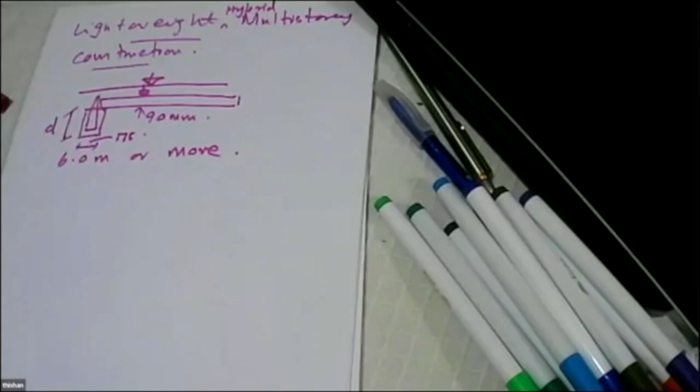Then we did a rough cost estimate, and what I showed was the weight is nearly 50%. Cost is sometimes even less than 50%, so it could be 50% or less.

Then, because we have this system where we precast the beams, so we cast the beams. It can be precast or cast in situ, depending on the lifting capacities available. If you have a tower crane, you can even precast these beams.

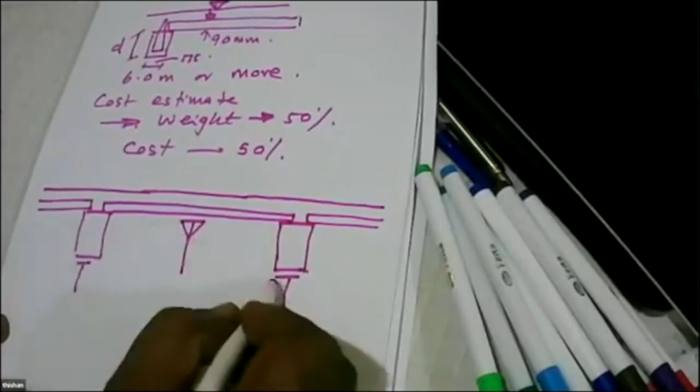Then, because we are doing a 45 millimeter thick screed, where all these beams are propped, so we prop them. There are props during the construction, so the deflection is zero.

When removing the props, first we have to remove these, then gradually remove them from the center outwards. If we remove the props from outer to inwards, and finally remove the middle prop, then we immediately increase the span by 100%.

So basically we have many props. When removing the props, it should be center outwards. But if we start removing the props the other way, removing the middle prop at once, that can increase the span by 2 times, adding a shock moment onto the system. So that is wrong. This is the correct way of removing the props.

But the center prop can be removed because the slab is not subjected to a heavy load.

Then the other important thing is, because we are having this only as 45 millimeters, the other advantage is that we can do it at a control phase so that we can finish it perfectly level, and then we can cut it so that either the tile bed can directly come on this, or another technique available is tile grout.

We add 1:1 sand as well. Rather than using grout directly, we can use a sand and grout mix, and that will allow us to maintain a slightly thicker tile bed, so that any unevenness on the surface can be taken into account by the tile bed. So you don't need a leveling screed, because if we are careful, we can do this without one.

So if you look at today's context, we need these because we are supposed to minimize the number of operations.

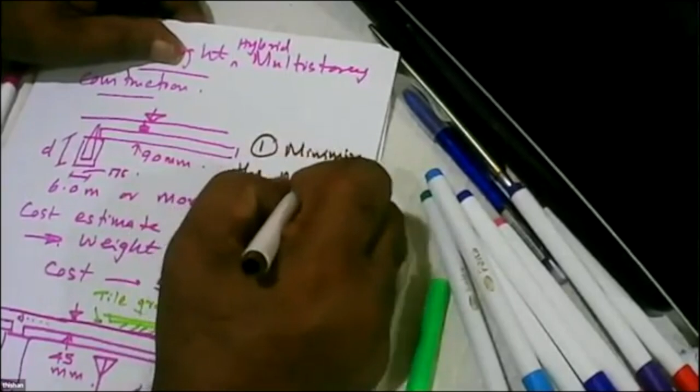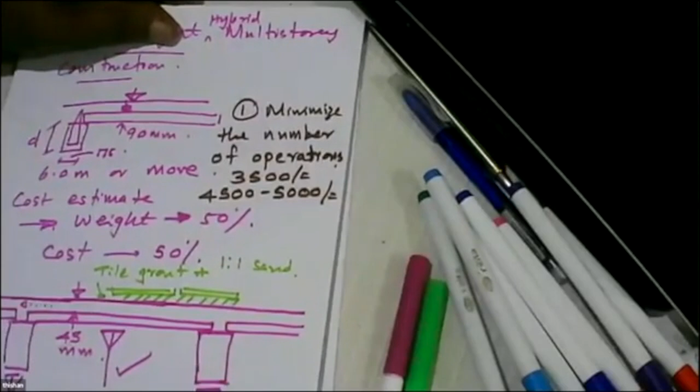Although we say labor is cheap in Sri Lanka, still we have to pay 3,500 rupees per day for a helper, and 4,500 to 5,000 rupees per day for a skilled laborer. So minimizing the number of operations is also an important part of this cost optimization process.

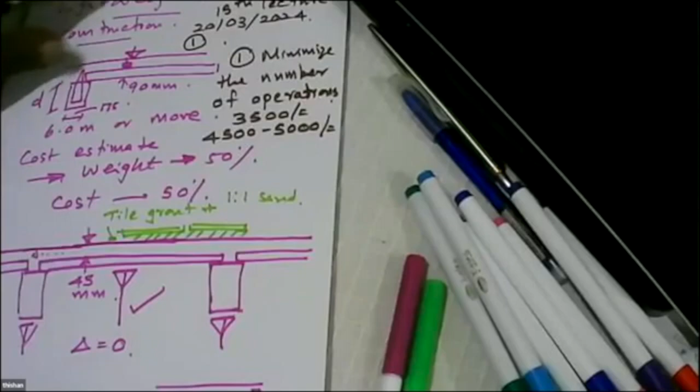So basically what you see is this. Then we have to see what possibilities are available when we try to apply this technology to apartment buildings and houses, and what remaining parts of design we have to do. So far we have covered most of the concrete related designs, like the design of the slab system, the composite system, and the design of individual beams. So all those have been covered in great detail.

Now today I'm going to talk more about, because it's a hybrid system, we are going to have a little bit of involvement of the wall. So the concrete block wall or cement block wall is also playing a role. So we have to look at masonry design and also the column design. We'll look into that aspect a little bit.

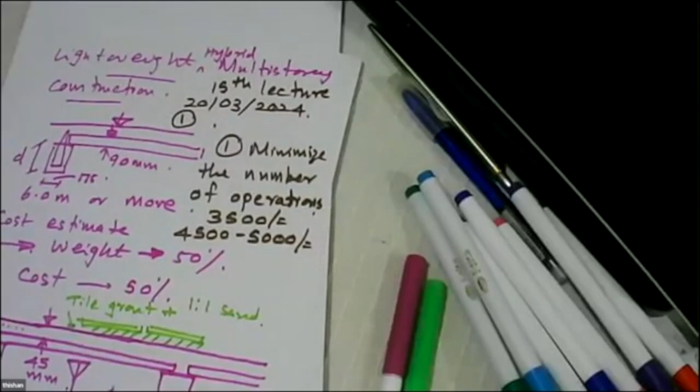So, the number 2. If I look at a typical scenario, let's say we have a house like this. So we have the rooms, this area.

Like wet kitchen, pantry, and bedroom, and washroom, whatever - it can be anything that we like. I'm trying to use the same plan I used earlier to highlight the issues. This might be the living area, and you might have a garage and entrance and bedrooms, washrooms, and so on.

So what are the issues? If you look at this type of system, how can we optimize? Here, these are living areas, so we might have large openings. We might need some columns like this, some columns like this, and we can have some columns like this, and we might also consider having some columns at these locations.

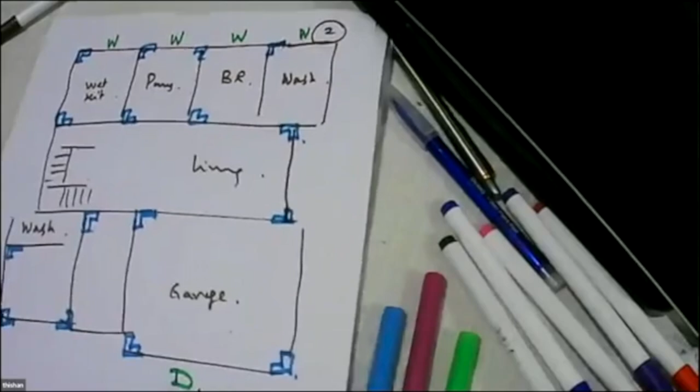So why do we need columns like that? For example, we need large openings, windows. We might need large doors here, and we might need large windows here, and we might need another large opening connecting the living and garage spaces, and here we might need a big window.

So when you consider all these possibilities, what is the best way to arrange the beams and how to optimize? Because we are having some columns here, we can certainly run a main beam here. I'll use purple for the main beams. We can run a main beam here, and we can also run a main beam in this selection area. Run a main beam here. Run a main beam.

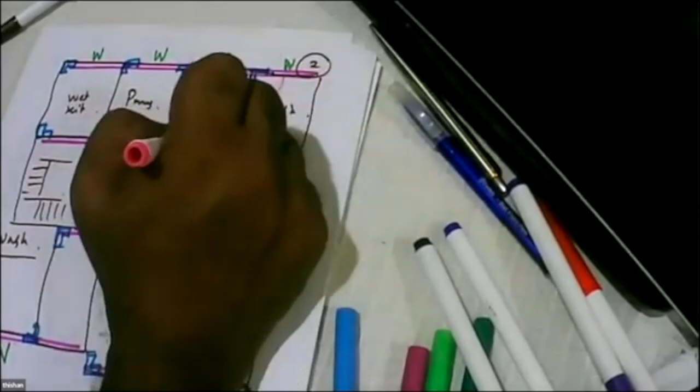Then we have to see in which direction we run the secondary beams, the beams that will support the slab panels. If you look at that aspect, what you see is we can run a set of beams like this, and we can run a set of beams like this, and we can also run some beams like this.

If this area is about 2 meters, you don't need to - you can directly support onto the beam, and here also we can run the beam like that. So those are the possibilities, which means we are running the slabs this way. Here also we run the slabs this way. So if you look at the scenario...

Here you can see these slabs will span this way. So these 4 meters, that is 4 meters, so half of that is 2 meters. So we have a beam. So this wall will carry a load. This wall will carry a load, and the load has a width of 2.0 meters.

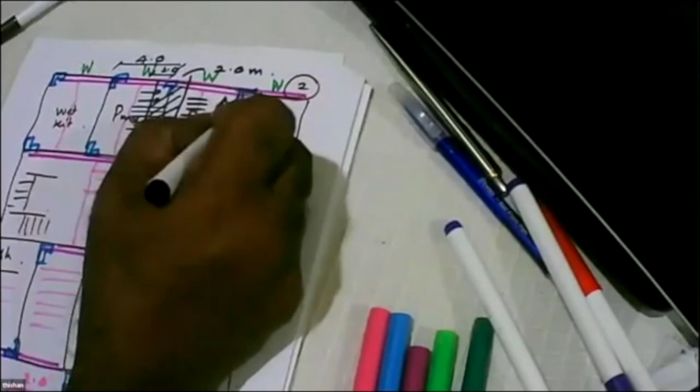And this beam will carry a load - 50% of this will be transferred this way, 50% will go that way. But that 50% will go onto another concrete beam, and there are concrete columns to take that load. So the concern may be the load that is transferred onto the masonry wall.

So we have a masonry wall. The thickness can vary between 150 to 200. Minimum is 150, and generally the maximum width of a block wall is 200. So we have an upper limit of 200. There's a load - a panel supported on the wall directly. Then on that we are going to build another wall like that, and then we might have another slab.

So if you consider that the load from the slabs - the slab thickness is 90 millimeters - so we have 1.35 times 0.09 into 25, plus 1.0 for finishes, plus 1.5 times the load. The minimum load specified in Eurocode is 1.5 for houses anywhere in the house, but we'll assume something like 2 just to keep a small margin.

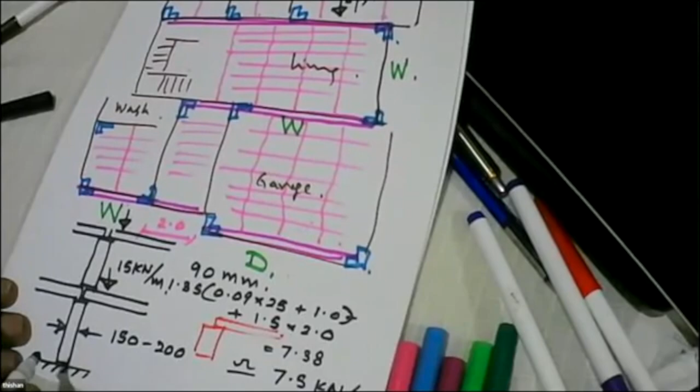So the question is, how many floors can this 150 millimeter thick wall support before it reaches its capacity? That is a question we have to ask.

For that, we have to look at masonry design. I'm planning to cover a little bit about masonry design. We have to learn how to deal with Euro Code 6, which covers masonry design, and see how the masonry design part of this hybrid construction can be handled.

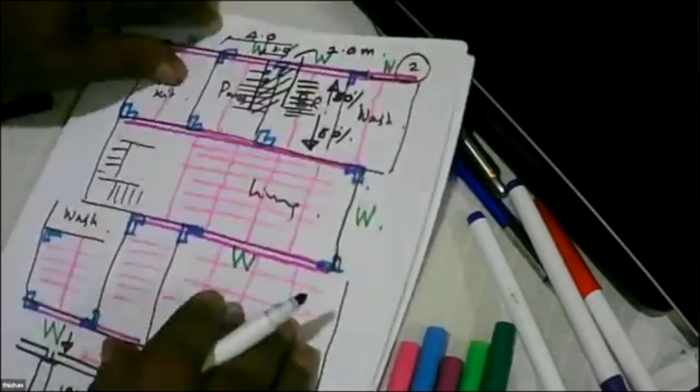But before that, we look at how to handle the reinforced concrete design part of the frame, or the structure. The reinforced concrete part will be these L-shaped columns and the beams supported by them. So now let's look at the situation on page number 3. We have to see where these columns will come.

So we have a wall, and the wall goes like that. When we have a wall like this, we can have two possibilities. The first possibility is we can have a typical 225 by 225 column, with the wall at 150 millimeters, and we try to fit this column.

But there are many disadvantages. One is it creates a corner, and plastering this corner is a difficult task. It takes time, it takes labor. It will not take any extra material, but it takes labor. And people find it unacceptable to have columns projecting like that.

So what is the other option available? The other option is to have 300 this way, 300 this way, and a thickness of 150. So it's an L-shaped column.

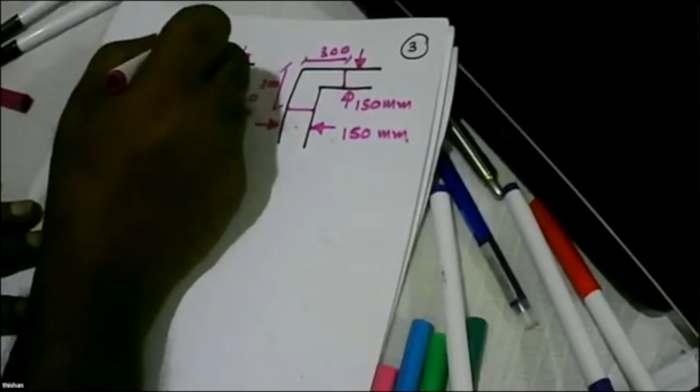Now let's do a comparison. This one is 225 by 225, so the area is 225 by 225. Here the area is 300 by 150 plus 150 by 150.

Let's do the numbers and see which one is bigger. 225 by 225 gives 50,625. The other one, 300 by 150 plus 150 by 150, gives 67,500. So we have two areas, and you can see this L-shaped column is even bigger. Although it looks small, it's bigger.

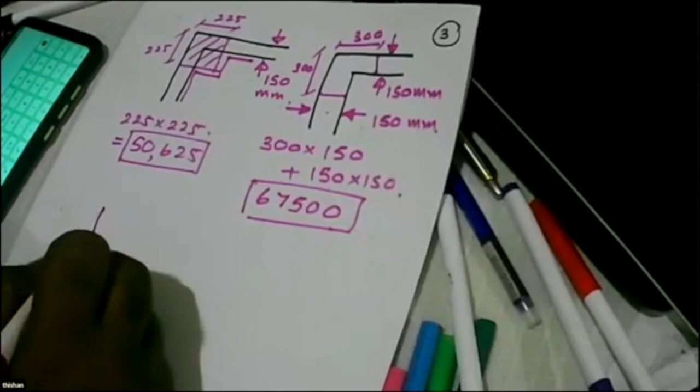If you look at the type of loads that come onto this column, the loads will primarily come from this side, going until it meets another column. These are the main beams, and every 2 meters it will have a beam running in the other direction.

So you can see these 2 meter spans, and all this load from here to here will be transferred onto this beam. And in this direction, if we have 4 meters, say 5 meters, then the load on this beam will be distributed like this. Let's assume this is a large window, with similar windows in the upper floors as well, so we can simplify the calculation.

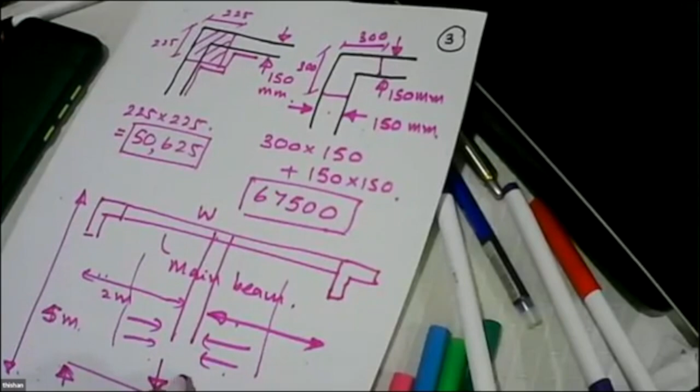So what we get is a load of 7.5 into 2 meters into 5 divided by 2, which gives 7.5 into 2 into 2.5. So we get a load of 37.5.

And since it's a continuous beam, we can analyze it, and you can see it's not a major load. Then we have to see at which level we can have this beam, because if we have a window, we need to have a lintel as well.

If you look at the level we need this beam, you'll see the building opening. Generally the openings are 2.4 meters tall, and each block has a height of 200, so the main beam can have a height of 2 times the block work, meaning the beam can have a height of 400. Then at the center we are getting 37 point...

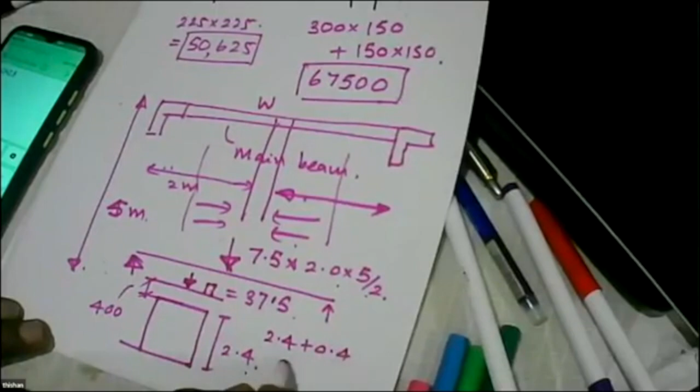Then we have to decide whether we are going to have the beams in the other direction, like this beam, and at which level — that's something we have to work out. So it's 2.4, 2.8. You find that 2.4 plus 0.4, plus if the height of the beam system is let's say another 0.4, the floor to floor height is 3.2 meters, which is not excessive.

So these numbers have to be carefully worked out. You have to decide at which level this beam will run, and ideally we run it at the lintel level, so that this beam automatically forms the lintel. So you don't have to spend money on a lintel or anything — the main beam will be the lintel as well, so there's an advantage there.

So if you look at this scenario, here we get a load of 37.5. Half the load will go this way, half will go the other way. So you can see from each floor what you are transferring onto the beam, and when you consider self weight of all these beams, it might be about 20 kilonewtons.

So you can see, we are not transferring a huge load, we are transferring a small load when the rooms are small.

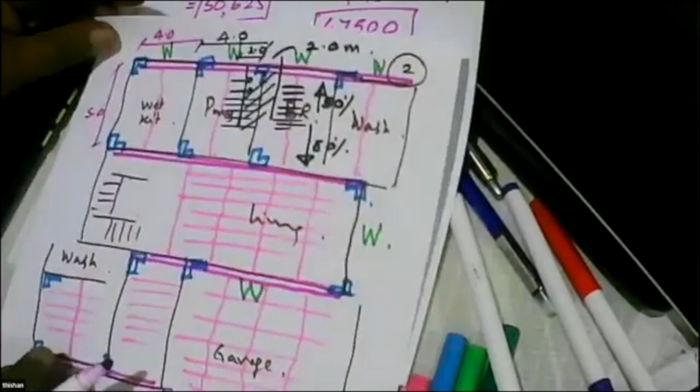I'm looking at this part of the building, where this can be about 5 meters, and these are around 4 meters. So that part, because we are transferring part of the load into this side by having slabs, and also we are having windows one on top of the other, the loads on this beam will not be excessive. So this column is very lightly loaded.

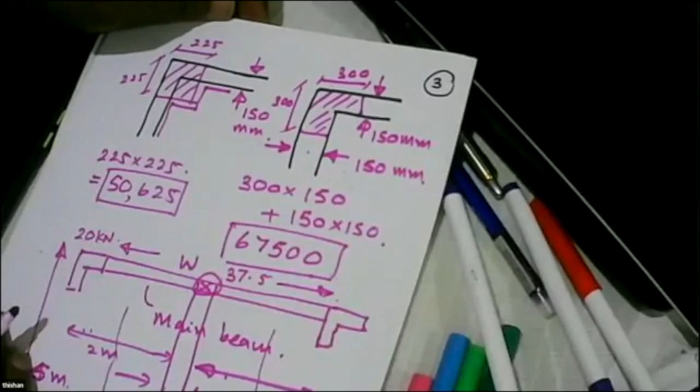So what I want to tell you is, we have a column that is very lightly loaded, but it has an area bigger than this column. So which means this is good news. Why? Because we have a column supporting a main beam, but it is not excessively loaded. So this says, okay, we can have minimum reinforcement on this column. That's good news, because we want to minimize the amount of reinforcement needed in the building.

So what is the reason for this? The reason is, part of this load is actually taken by the wall. That is the reason. So you can see, not only with the slab, even with the frame involved, we are going to get advantage where we need minimum amount of reinforcement.

So if you look at this scenario, let's look at the column. So I'm showing you the possibilities. So when you do the actual calculations, we can get the exact numbers. So this has 300. This has 300. This has 150. This has 150.

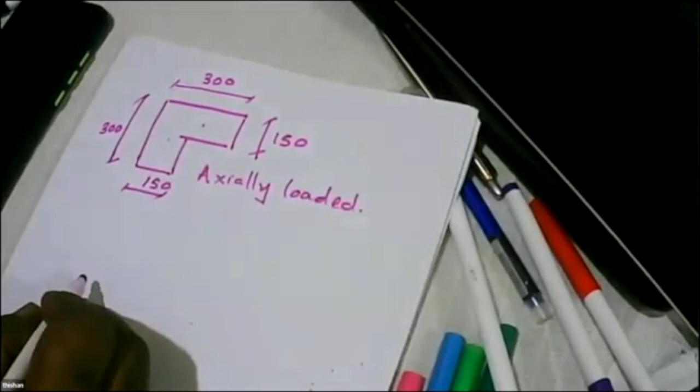So let's assume that this is axially loaded. Then without reinforcement, and let's assume that we have been smart and we have been able to get a concrete of C25/30 by using some admixtures and also with proper curing. So if we get 25 megapascal concrete,

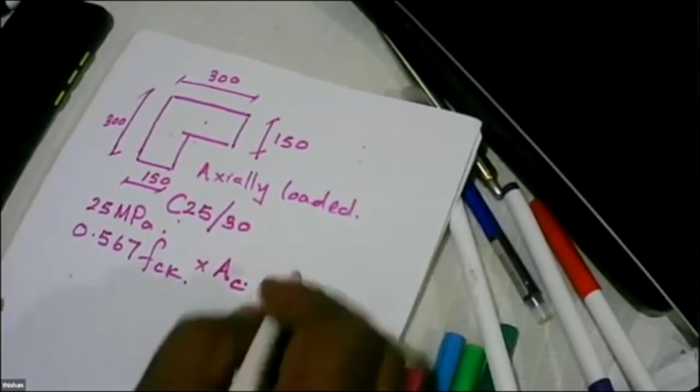what is the load carrying capacity of this section? Load carrying capacity is 0.567 FCK times area of concrete. How to get it? Because when you test a cylinder, strength is FCK, so the axial load carrying capacity is 0.85 times FCK, and we have to divide it by the partial factor of safety for material strength, 1.5. So 0.85 divided by 1.5 is 0.567.

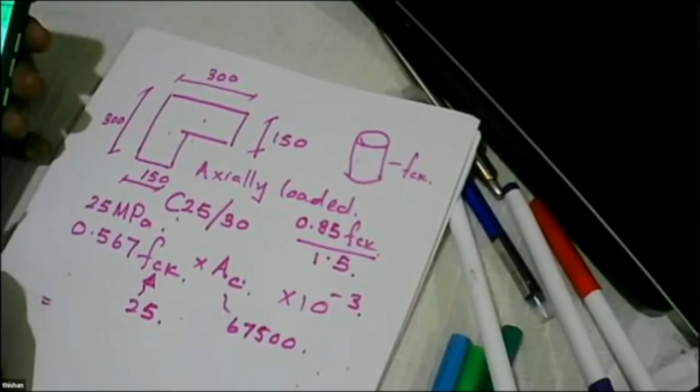So we can substitute 25 here, and we can substitute the area 67,500 here, and we can divide, 10 to the power minus 3, and you will see that this can carry 0.567 into 25 into 67,500, which gives 956 kilonewton capacity.

So you can see this column, although it looks small, it is not small. It is bigger than the typical or most familiar size of columns, 225 by 225 column. It's bigger, and it can carry about 956 kilonewton. And its buckling tendency is very low. Why? It's L-shaped, and each direction has a length of 300 millimeters. So the tendency for buckling is very low, because it has a 300 millimeter length in one direction. Although this part is empty, the buckling tendency is very low.

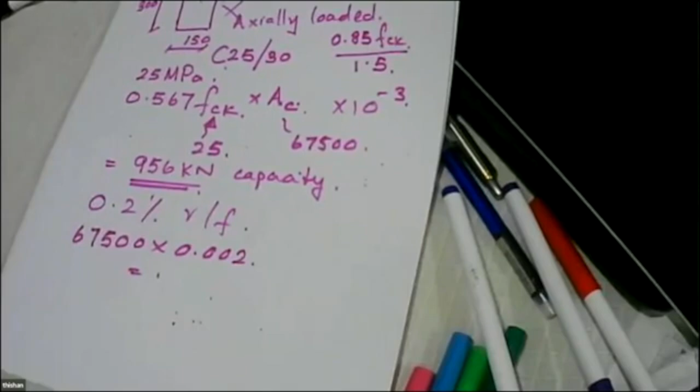So we can provide 0.2% reinforcement as practiced in the Eurocode. So 67,500 into 0.002 is equal to 135 millimeters square. But Eurocode says when you are providing reinforcement, the minimum size for the vertical bar is 12 millimeter. So you need a 12 millimeter bar.

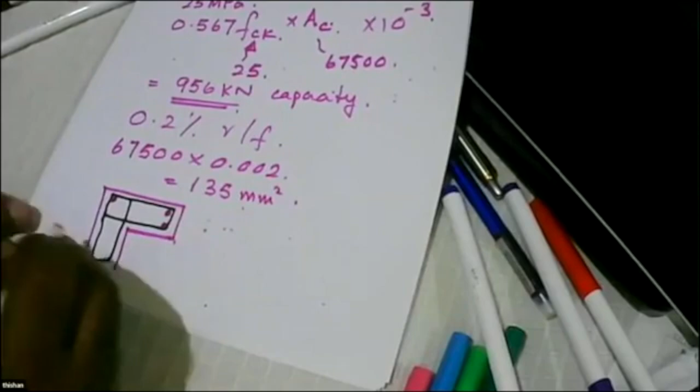We need one bar. So the moment you have bars like that, we can have a link, and we can have another link this way. That also can be provided with 2 bars. So the minimum number of bars that we need in this column is 5 numbers of 12 millimeter, giving 113 into 5. So something like 550 millimeter square is much more than what is given there.

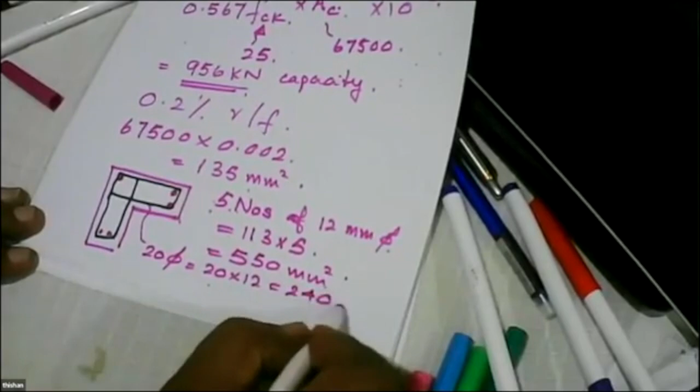Then we can have links at 20 times diameter. 20 into 12 is 240. So we can have links at 225. And Eurocode recommends at the top and at the bottom, 400 millimeters, reduce this spacing up to 0.6. So 225 multiplied by 0.6 gives something like 150. So here we can have 150 center to center, bottom 400 millimeters, 150 center.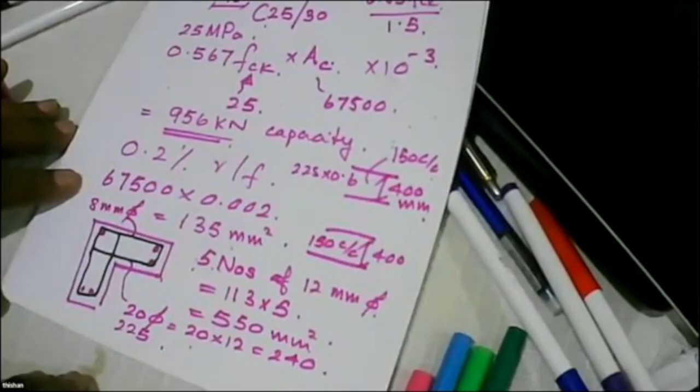So you can see we need some links, and unfortunately we don't have any bar size less than 8 millimeters. So this link has to be 8 millimeter, because Eurocode does not allow mild steel. It says any reinforcement should be 400 to 600 type. It doesn't talk about the link specifically, so the link also should be the same strength. Because of that reason, the smallest size of reinforcement available in the market is 8 millimeter. So we have to use 8 millimeter links.

This shows the possibility that we have a column which actually goes into the wall.

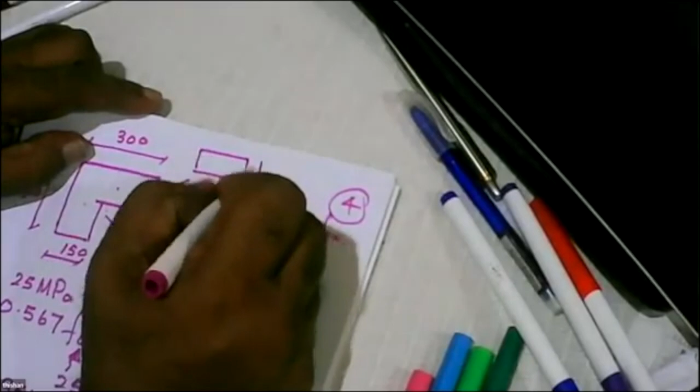But then you might ask, why don't we go for a 300 by 150 column? We all know 150 is not a very safe dimension because this might have a tendency for buckling. So why we go for L shape is to prevent that tendency for buckling. The moment you prevent the tendency for buckling, how does the column fail? Column fails by crushing of concrete. So we ensure that the column fails by crushing of concrete, not by buckling.

Otherwise, this L shape is not needed unless for the buckling tendency of thin columns. We deliberately make the column thin for practical advantages, like not showing the presence of the column at the corner. So we are going for L shape, which is actually larger than the normal column. We need a little extra concrete.

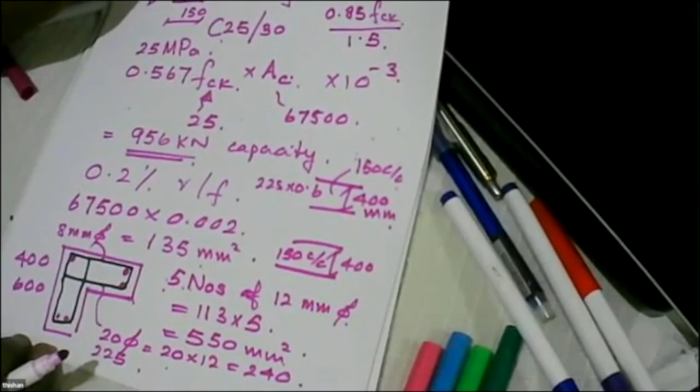But if you look at the system, the main advantage is we run the main beams only in one direction.

All the other beams are beams of the slab system, or else we might have a beam at the lintel level like this, or we are making use of the wall to carry the vertical loads. Because of all these reasons, we can get a significant cost advantage, since we are using the minimum size reinforcement, and even if we go for 5-6 stories, still we can go with the minimum size of reinforcement. That's a huge advantage when you consider the cost of construction.

And the other important aspect is these columns are not obstructing the arrangement of the interior, because columns can be made part of the wall system. Is that clear, Bandhukar? Yes, that is clear, sir.

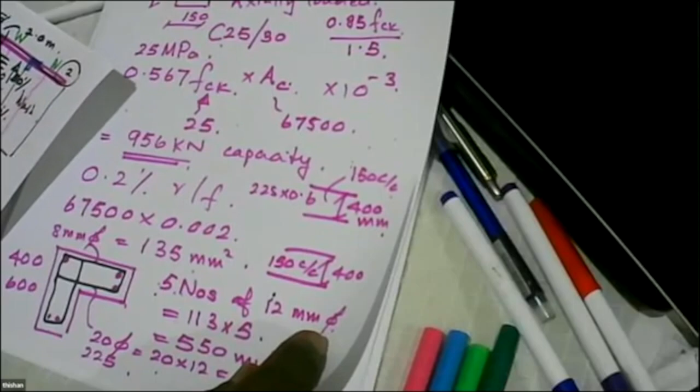So now you can see there's no major issue with the columns, and the main beam is also not a major issue. But it's most likely that because we are going to have this main beam at the lintel level, we will have to design the main beam as a rectangular beam, 400 deep, 150 wide.

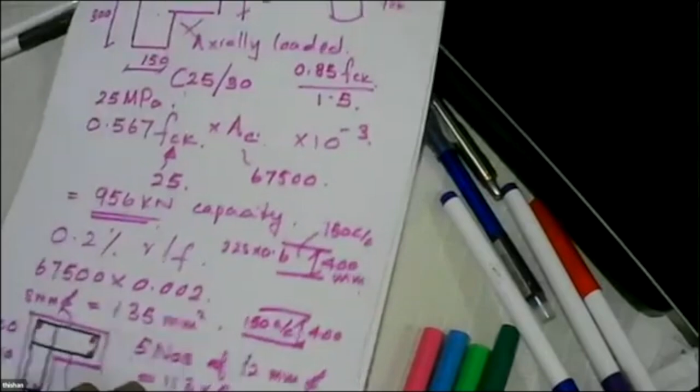So there's no buckling tendency in any of these members because they are all part of the masonry and concrete system. So then you might ask, okay, so we can see the possibilities for apartments, but I would like to take one step further, explaining the possibilities for apartments.

In an apartment building, we can have large spans like this, where two of them might form, or one of them might form the apartment, depending on the size. So this can be about 7 meters, this can be about 8 meters. 8 multiplied by 7 is 56. So this area is about 56 square meters.

So in an apartment building, what we can do is go for large spans like this with columns at the corners. This is only a possibility, so you have to think and see how best we can optimize, so we can get the whole apartment, or about 50% of the apartment, onto one panel like this.

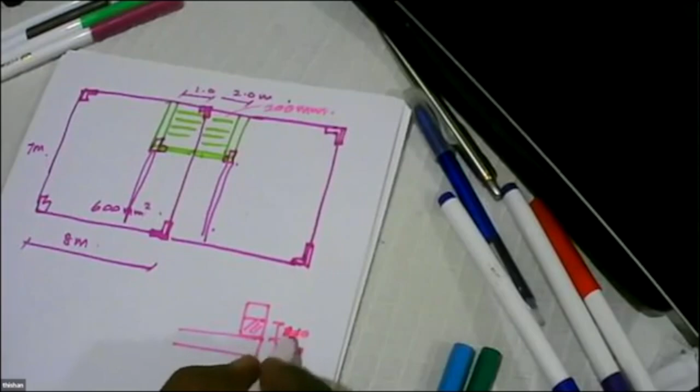So we can have the panel with a drop of 200 millimeters and fill this up. So this can be 200, and our panel can also give 90. So this can be 110. So we make up 200 millimeters, and then we can run other main beams.

The advantage of this is that now if you are going to have any partition wall, it is not a major problem. Why? These beams - now if we want a partition wall, what we have to do is below the partition wall have a lintel or a beam of 200 millimeter depth, and the partition walls can be 100 millimeter. So what happens? This beam will transfer the weight of the partition wall onto this beam and onto this beam.

And when you are designing the beam, because we have to design the beam for all these loads, you will find the beam is subjected to a UDL plus a point load. So it's a matter of designing this beam to carry it.

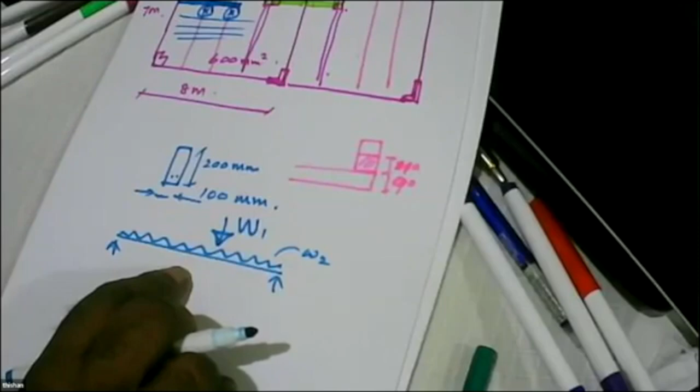So you can see there's a huge possibility that is not available with solid slabs, because solid slabs are not capable of supporting this kind of partition walls without having a huge amount of extra reinforcement. Whereas in this system, because we are having beams, we can easily support any kind of partition wall either across the beam or along the beam. So we can have a partition wall here, no problem, because this beam can be designed to carry the weight of the partition wall. So Bandhuga, can you see the advantage of this system for apartment buildings, right?

Yes, sir. So if you carefully plan the apartment building, this needs a lot of planning. Yes, sir. But you can certainly make sure that the system is very efficient, and you don't have to go for a lot of walls at various locations.

You can concentrate the columns at a few far apart places, run the main beams, and on that run the apartment, so that all the apartment loads will be transferred to the main columns that you have selected. So one question, sir. Yeah.

When developing these floor plans, whether at the architectural stage, those things should go parallelly, or? Yeah, so basically, you have to work with the architect and make the architect understand what are the positive sides of this system, so that the architect will adopt the positive side of it, right? Because this has a lot of positive aspects.

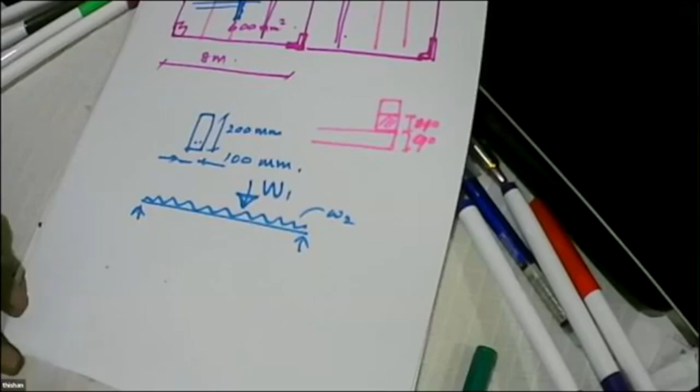When I presented the slabs, what I said was, when we have two 2H8 bars with the beam supporting it, and make it continuous by having continuity reinforcement, this 2H8 at 150 can give a huge capacity. So sometimes you will find these additional beams are not essential.

If you have done the construction properly, even the slab system can take it, because when you support a wall on a panel, the weight of the wall is W. Only 40% of W will be carried by this panel. The remaining 30% and 30% will be carried by the adjacent panels. So when you apply a load on a width of 300 millimeters, the actual load will be carried by a width of 900 millimeters. Because of that, and also we have 90 millimeters spanning only 2 meters, it gives huge potential. If you have any lightweight material, it can be directly supported on the slab without having any concrete elements.

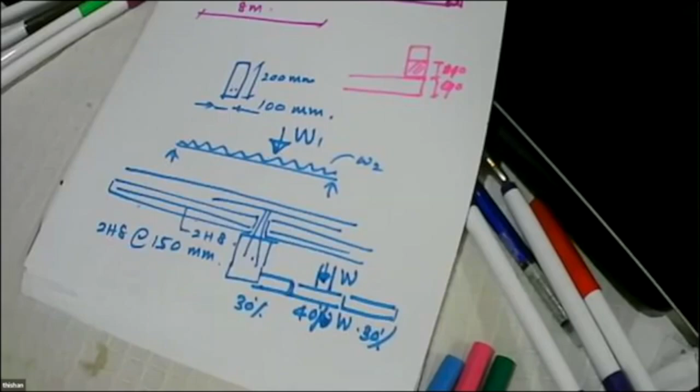This opens up a new era where we have to think more about lightweight materials, lightweight panels or lightweight blocks. That's where the future lies, because when we go for large spans, this system itself is lightweight. And the other advantage is this need not be 150 blocks. If you are going for large apartment buildings, we can go for 200 millimeter blocks, which will allow the column to be automatically bigger, like 400 by 200, giving even bigger possibility, provided the architects are willing to take up the challenge of going for open architecture, where lighting and all those requirements can be satisfied, and washrooms can be located one on top of the other.

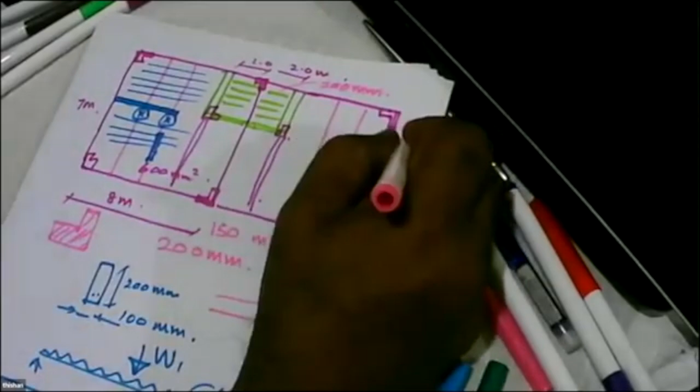So there's a great possibility to plan buildings using this system. That's what we actually found. So what I say is, we like many of you thinking about these possibilities, because this may be the future. The reason is we can reach a cost saving of around 50%.

Is that clear, Bandukar? Yes, that's clear, sir.

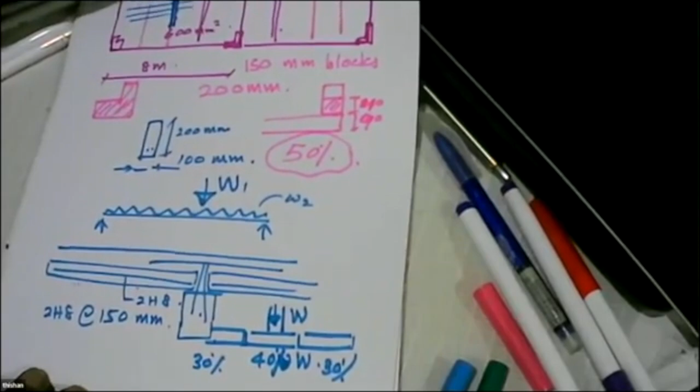Basically, why I present this is, we like many of you thinking positively about it, yes, the advantages that this can offer, and also explaining these structural systems to architects, so that they will also start thinking in the same lines, and they will come up with feasible solutions that will finally give us huge cost advantages, and the industry, or the general public, will find investing in buildings is a possibility again. At the moment, they consider it's not a possibility. But the moment they find the costs are lower, they will find investing in the industry is a possibility. So what I feel is this lightweight hybrid multi-story construction has a huge potential to revive the industry.

Is that clear, Vandukar? Yes, sir, that's correct, sir.

Then we also have to think about commercial buildings, where the situation is different, where we will have large buildings, large spans, things like that. This is the large span. So in this area, core, and these areas being slabs, main beams.

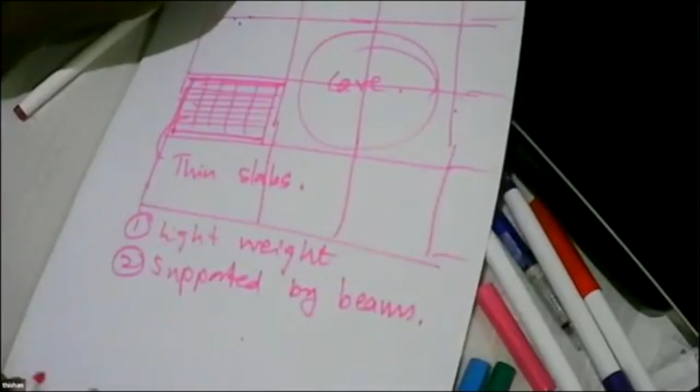So the possibilities, all these can easily be converted to these thin slabs. Although the spans are large, the thin slabs can easily span any length, because one, they are lightweight, and secondly, they are supported by beams. So there are two possibilities. The applications can be there for even tall and super tall buildings. Irrespective of the application, especially in commercial buildings, there is a huge possibility.

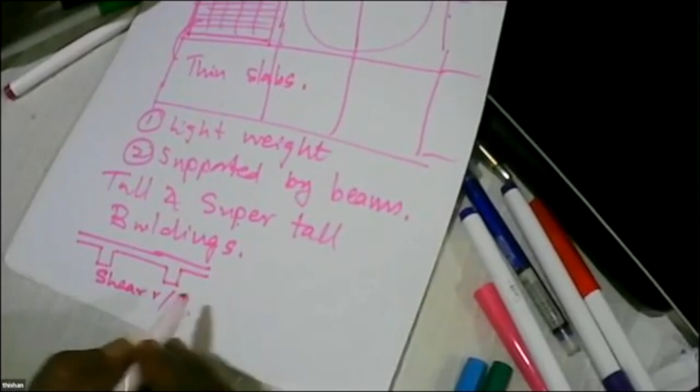What you find is this is not something new. If you look at textbooks, you can find things like rib slabs. But what is new is these rib slabs did not usually have shear reinforcement, whereas the beam system we are designing has shear reinforcement. So it has a huge strength, because we are not relying on the strength of concrete to carry shear.

Whereas if you look at most rib slab systems, we rely a lot on the ability of concrete to carry shear. In this system, we are not relying on concrete to carry shear, we are providing shear links in a lightweight system. That's why it can span over long spans, like 6 meters, 8 meters, all are possibilities, because 8 meters is a big span. But because we have a lightweight system, the slab thickness is only 90 millimeters, and each beam supports a load of only a 2 meter wide strip. All these strips are only 2 meters wide, so columns and beams carry only that load.

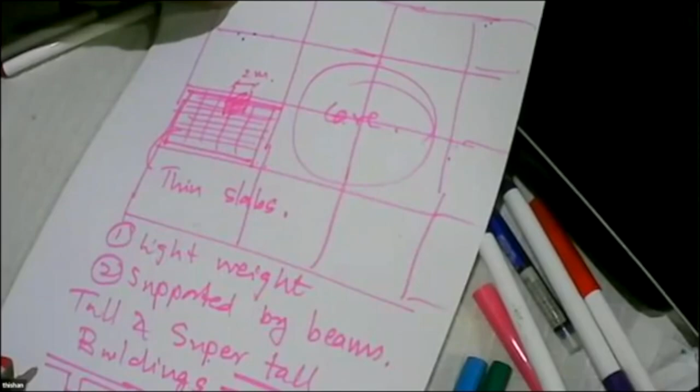You find the system works very well because it has no restriction on the spans. That's how it becomes a viable solution even for tall buildings. The other advantage for tall buildings is all these can be precast. Sometimes these beams can even be pre-stressed concrete, since we really have no need for it to be reinforced concrete.

The advantage is all tall buildings have a tower crane, so the moment there's a tower crane, lifting the beams and placing them can all be done with it. There's a huge cost saving, because lifting these is a tedious affair when done manually. Whereas in a tall building, most of it can be precast elsewhere and fitted at the site with necessary continuity reinforcement, making the super tall building super light while having robustness.

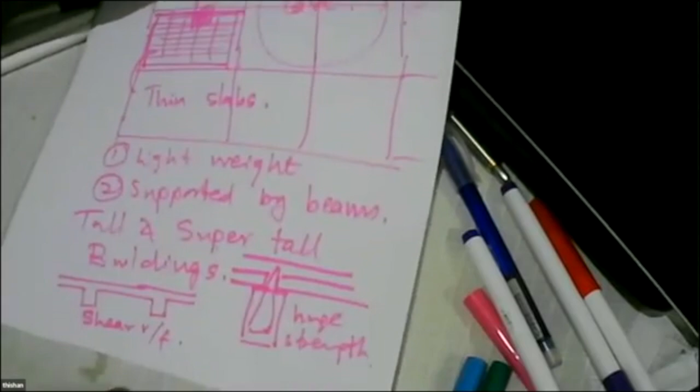So that's the future possibilities. Is that clear, Bandukar? Yes, that is clear, sir. Okay, so these are all possibilities. There's a huge potential for us to do more and more studies, case studies, and practical applications. But we have to be a little bold and do it, otherwise it will be another good solution limited to research and development. We'd like it to be taken to a new stage. So in tall buildings, you will not have many restrictions.

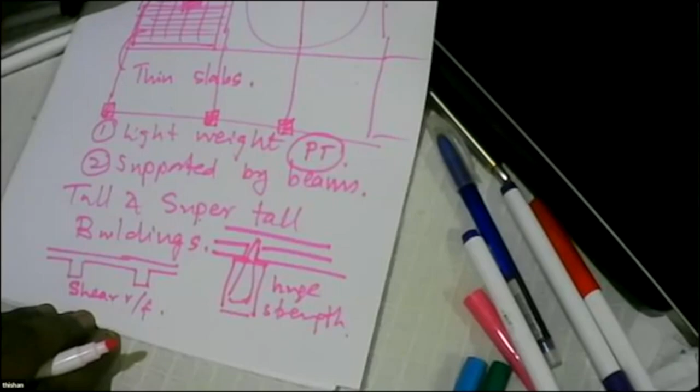The masonry will not be carrying the job, it will be concrete. This allows us to bring pre-stressed concrete into the building by precasting the beams, and not only the beams, even the slabs can be precast with pre-stressed concrete. Especially in large buildings, there's a possibility to precast the whole building, except the main columns and beams, elsewhere and fit it at the site, because concrete slab work is a major task even in commercial buildings, needing a lot of attention and work at the site. All of that can be reduced if we develop these systems more, because this has huge potential, especially because of this shear link.

Most restrictions on other systems have been that they tried their best not to have shear links because they are cumbersome. But in this particular system, because we go for precast slabs of 2 meters, we have only a few beams, and those can be precast or in-situ cast depending on the requirement. The main aim is to minimize reinforcement, and the other aim is to remove any concrete that is not doing anything useful - remove as much concrete as possible if it isn't useful. That's where PT also comes in, because in the PT section, the whole section is effective.

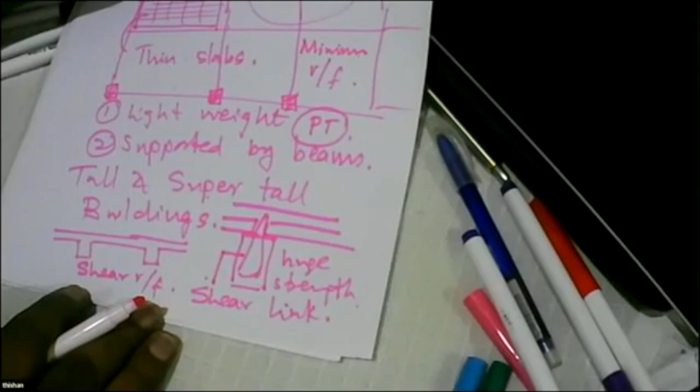So pre-stressed concrete also has huge potential in this system, where the PT beams have to be cast with links. That is not a major problem - you can do the precasting operation with shear links. That's not a major hurdle, so that can be done. Okay, Bandukar?

Okay sir, right, now let's look at masonry design. I will use a note, I'll share the screen now. I'm sharing our undergraduate note where we teach masonry walls. You are all familiar with masonry, so I don't have to explain a lot about it.

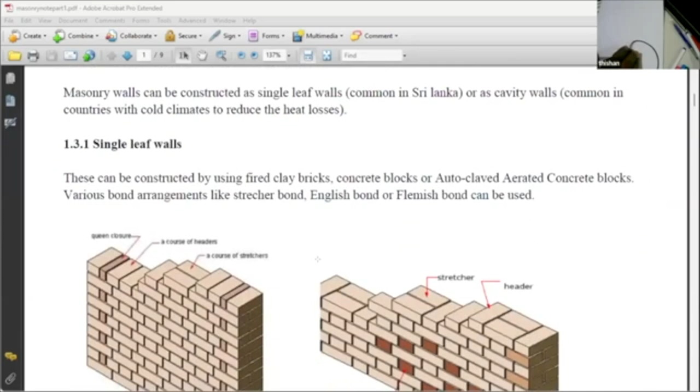But I'm going to talk about the strength of masonry, because the first thing is to know what is the strength of masonry. There are so many different types of masonry available, like this - you can do masonry with insulation, all kinds of possibilities are there. And then, for masonry also, we use the same partial factors of safety: 1.35 GK plus 1.5 QK.

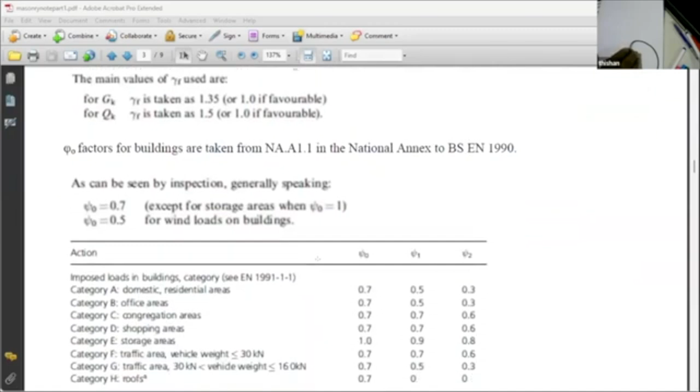In Eurocode, we all know there are psi factors, psi 0, psi 1 and psi 2. For wind loads, psi 0 is 0.5, and for live loads psi 0 is 0.7, and those are the exact same values we use in reinforced concrete design. So when you have dead load, live load and wind load, we have a load case: 1.35 GK plus 1.5 QK plus 0.5 times 1.5 WK, which gives 1.35 GK plus 1.5 QK plus 0.75 WK.

Then where dead load and imposed load dominate, we can have wind load dominating instead. In that case: 1.35 GK plus 0.7 times 1.5 times QK plus 1.5 times WK, which gives 1.35 GK plus 1.05 QK plus 1.5 WK. So that's the same thing we do in masonry and concrete - no difference at all, same thing.

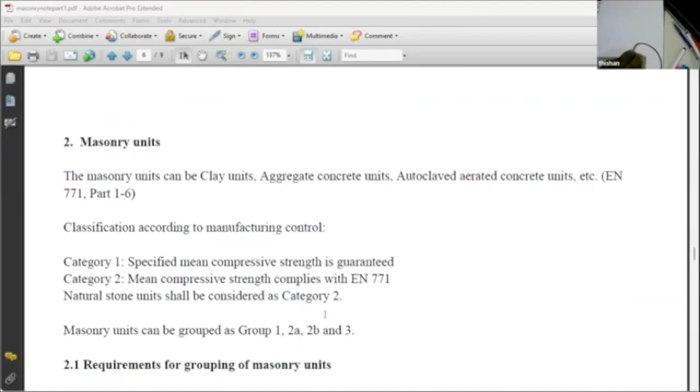Then we can have masonry units, and there are so many different types of masonry units. There are hollow units. Here we are promoting hollow units made out of concrete aggregate, having the opening area between 25 to 50%. That's the type of blocks we manufacture in Sri Lanka - they are hollow blocks, but they have a certain wall thickness. So when you look at the total gross area of the volume, you find it's between 25 to 50%. You can actually measure it to see which category it is, but generally it is in this category.

So what you have to keep in mind is we are looking at a group of masonries which is 2A.

Then we have to use certain mortar - generally M2, M4, M6, or M12 mortar. But in Sri Lanka, generally we use M4 mortar, which is 1:5 or 1:6 cement sand mortar without air entrainment. When you use 1:5 mortar, generally we can get a strength of 4 megapascal, that's why we call it M4 mortar - the expected strength is 4 megapascal. Basically M4 means the number following the M is the compressive strength for the class at 28 days in newtons per millimeter square. So when you say M4 mortar, we are looking at a mortar which gives a strength of 4 newtons per millimeter square, or 4 megapascal.

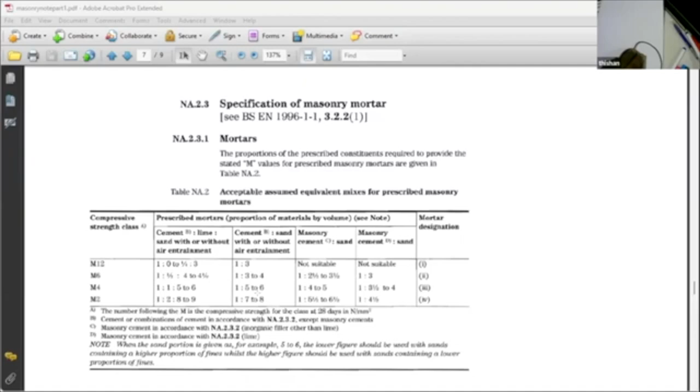And to get that, we have to use a 1:5 cement sand mix. But the important thing is the cement sand mix should not be mixed in the morning and used in the afternoon. Generally within 2 hours of mixing, the mortar should be used. We should not mix too much mortar - we should mix it in small quantities, sufficient so that we can use it once mixed. We should not keep the mortar without being used too long. Otherwise what happens is they keep it long and it sets, then they break it again and mix with water and use it - that's not a good practice. So we should make sure the mortar is mixed in small quantities and used, rather than mixing a huge amount and using it over the day.

Now the most important thing is not the compressive strength of the masonry unit, but the compressive strength of the wall. If you look at the compressive strength of the wall, the characteristic strength Fk is given by K times Fb to the power alpha, Fm to the power beta. Fb means the compressive strength of the block, Fm means the compressive strength of the mortar.

You can see this Euro code has been very good, because when we test the individual block and know the type of mortar we are using, straight away we can find the characteristic strength of masonry. Otherwise, even in the British code earlier, we did not have that kind of data, that kind of tables. But in the Euro code it's very good - straight away we know the type of block, we know the type of mortar, and there's a K factor. So it's a matter of finding the K factor.

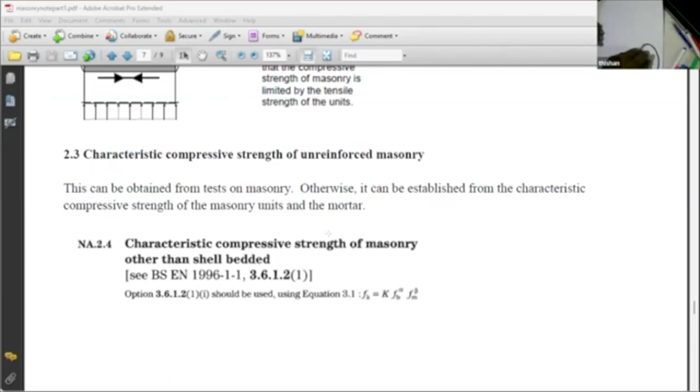That's a huge advantage because the masonry code is not looked at by many, but this is a very good code because it helps us do masonry design with a limited amount of testing on the type of unit we are using. Then the most important parameter is K.

If you look at the K parameter - aggregate concrete, remember I said it's group 2, even group 1 - all these are around 0.5 value, with general purpose mortar. So we have a situation where Fk is K times Fb to the power alpha and Fm to the power beta.

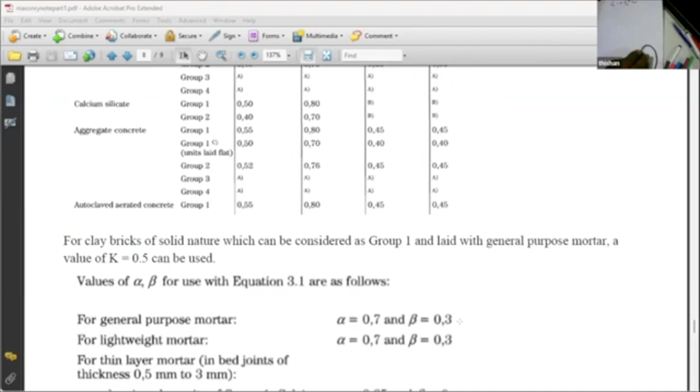When you use general purpose mortar of 10 to 12 millimeter thickness, alpha is 0.7 and beta is 0.3. So it's a very useful value, right?

So if I look at an example, alpha is 0.7, beta is 0.3. Right? So that's what you get. And K is 0.52. And Fm is, because we use M4 mortar, 4 newtons per millimeter square. Very easy.

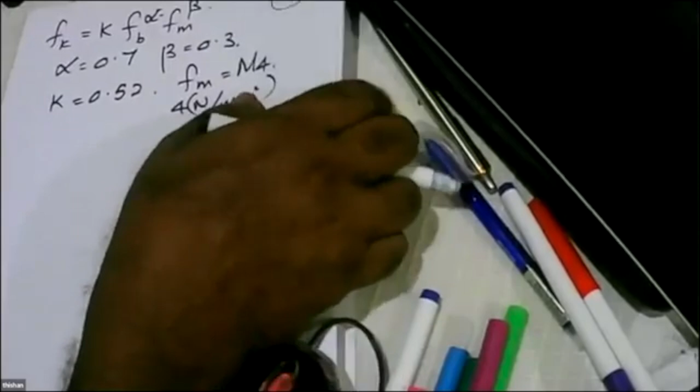So what happens? Fk is 0.52, and let's say we are using 5 megapascal units to the power 0.7 multiplied by 4 to the power 0.3. So what is the strength?

Strength is strength of masonry. Characteristic strength of masonry is 0.52 multiplied by 5 to the power 0.7, which is 3.08, times 4 to the power 0.3, which is 1.51. So this comes to 0.52 multiplied by 3.08 multiplied by 1.51, giving 2.42 newtons per millimeter square.

So if you buy good high quality hollow concrete blocks of 5 megapascal strength at whatever age you are using it, then the characteristic strength is 2.4.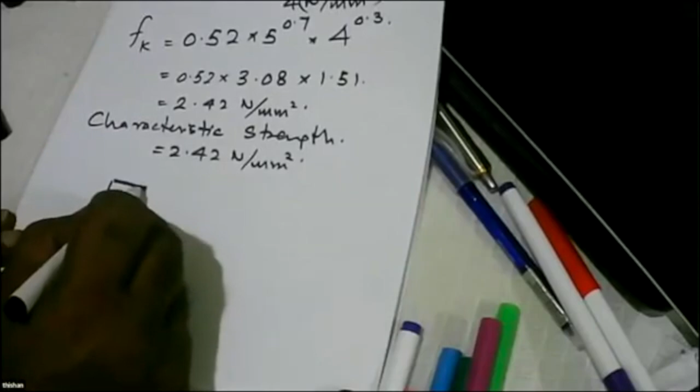But when you try to use masonry as a material, we have to look at it in this context: it can buckle, because it's a slender wall, 150 or 200, not a thick wall. So it has a tendency for buckling, and we have to allow for that. Then we might not load it axially, we might have an eccentricity when applying the loads, so we have to take that into account. So we'll have a capacity reduction factor.

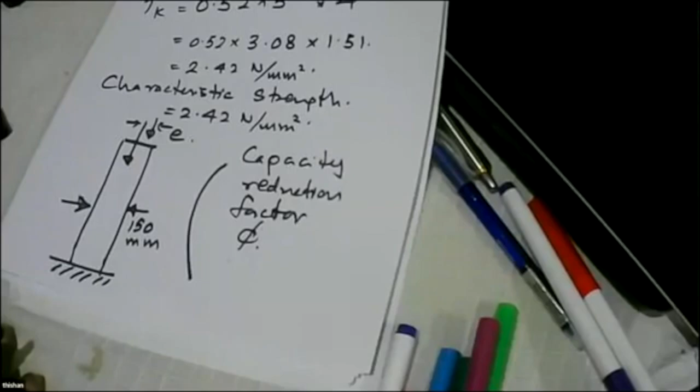We'll have a capacity reduction factor. Look at the capacity reduction. And when you are using characteristic strength, we have to have a factor of safety, gamma m, on the material strength.

I'll share the screen. So what are the material strengths? When in a state of direct or flexural compression, unfaced masonry may use units of category 1 or category 2. The factor of safety can be 2.6 or 3.

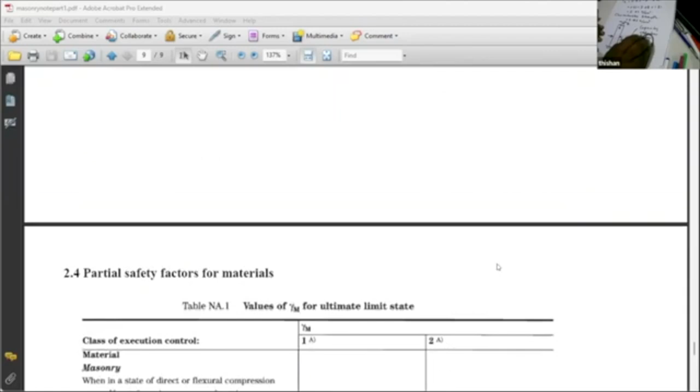And let's see what are A and B. A means special control, so under A we are talking about special quality control. And B means normal quality control. So it's better to go with B, so you will get gamma m of 3.

So, and then let's assume that the capacity reduction factor phi is 0.7. Then what is the final stress we can have? The final stress is characteristic strength divided by gamma m of 3, multiplied by the capacity reduction factor 0.7.

So you will find the stress that we can have on masonry is now limited to 2.42 multiplied by 0.7, divided by 3, and it's limited to 0.564 newtons per millimeter square.

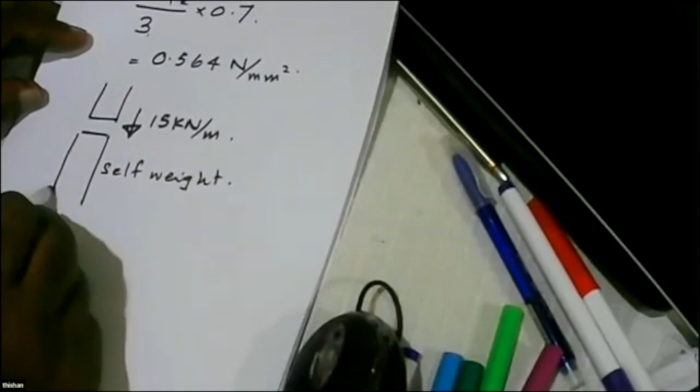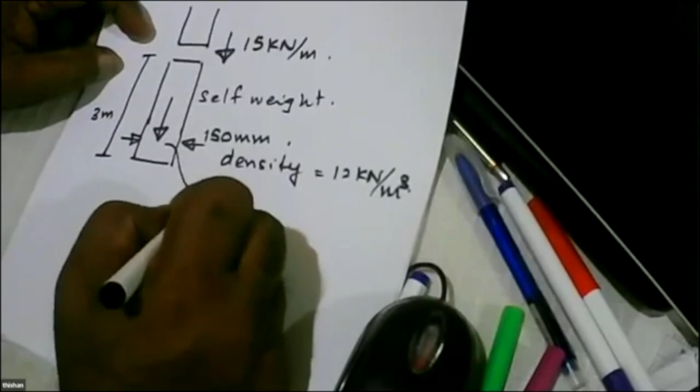And if you consider a height of 3 meters and a width of 150 millimeters, a density of 12 kilonewtons per meter cubed, because it's a hollow material. Now you can see why I prefer hollow materials, because it has a lower density. So each wall will give a load of 0.15 into 3 into 12, which gives 5.4 kilonewtons per meter. Is that right, Bagdu?

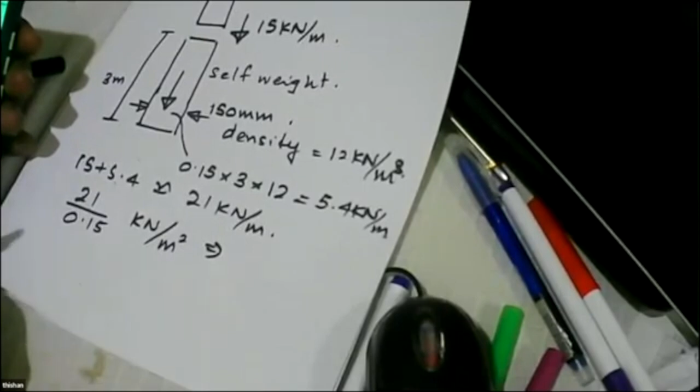Yes sir, 5.4. Right, so you can see, so each floor we can say 15 plus 5.4, let's say approximately equal 21 kilonewtons per meter. So if you convert it, you divide it by the width, 21 divided by 0.15 kilonewtons per meter square. The value is 21 divided by 0.15, which is 140 kilonewtons per meter square, or 0.14 newtons per millimeter square.

So 0.56 divided by 0.14, what is the answer? 4. So that means we can have 4 floors where masonry supports part of the slab load.

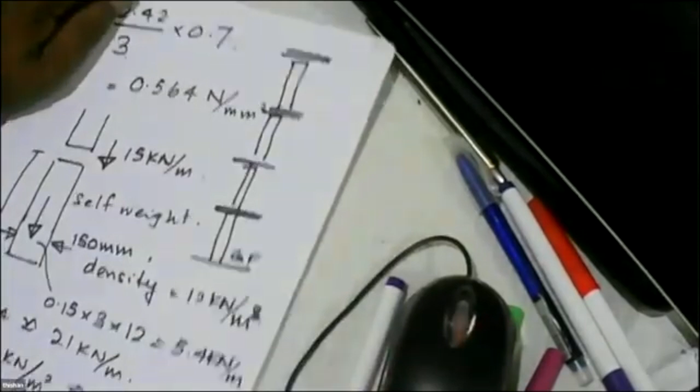So we have the ground floor, we have a slab, we have another floor, we have a slab, we have another floor, we have a slab, we have another floor, we'll have a slab. That's possible. So you can see, even with 150 blocks of 5 newtons per millimeter squared strength, it's possible to go up to 4 floors.

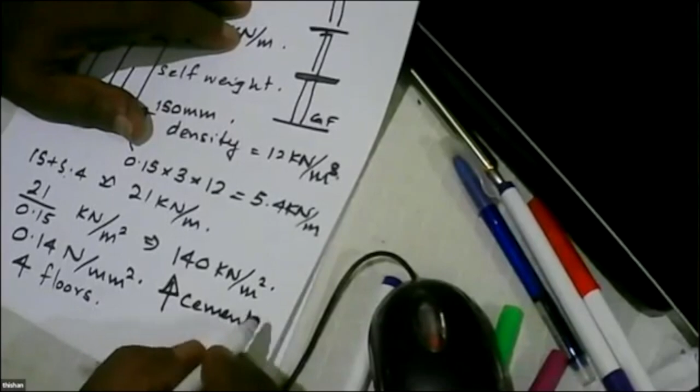If you have a reputed manufacturer, what they say is, you specify the strength we supply. Why? Because this is concrete based material, if you ask for 5, they make sure they cure it, keep it moist, and cover it with polythene, and the curing will continue. What they have to do is increase the cement content. Sand, aggregate, everything will remain the same. So the cost of the block will rise slightly, but you can increase from 5 to 7 or 5 to 8.

This shows a huge potential in this system, where you can have either 150 millimeter blocks or even 200 millimeter thick blocks. And you can see when you combine the lightweight slab system with the lightweight blocks, the opportunities are huge.

Is that clear, Bandukar? Yes, sir, that is clear. So next day we can discuss more about masonry design, how to think about the openings, the stress concentrations, and also how to calculate the capacity reduction factor accurately. So all those things we'll have a look, so that you can handle this combined design. It's not only RC design. This involves RC design, this involves masonry design. So it's a combined effort that we need.

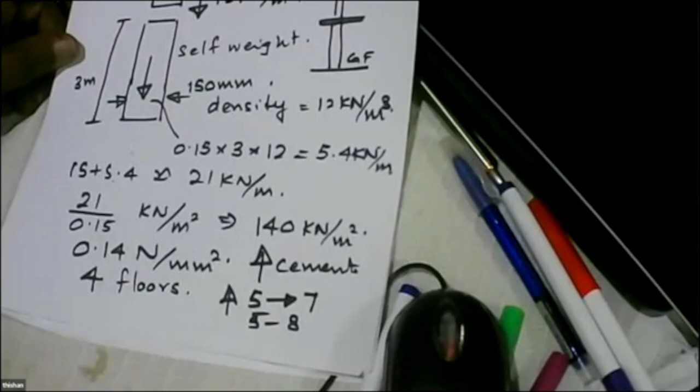Yes, sir. Right. So with that, we can conclude today's lecture. If there are questions in the chat. There are 3 questions. What are the questions?

Is it possible to use L-shape for the column footing? L-shape for the column footing, column footing also to be L-shaped. That is not a major problem, major challenge, but we don't have a specific reason to do that, because why we use L-shape is we want to embed the column into the wall, but at the foundation level we don't have any restriction as such. So you would be better off using a rectangular footing, right?

Okay, right. And the other question is, in solid slab, shall we consider it as a strip slab and design additional rebars for this partition wall loading? Yeah, you can do that, because if you look at Hillerborg's strip method, that covers that aspect, but that is not the exact problem.

Problem is you need a lot of reinforcement. Whereas in this case, we increase the reinforcement in the beam, which is a much better element structurally than a slab to carry heavy loads. Slab is actually an ideal element to carry light loads. Beam is an ideal element to carry heavy loads. So in the normal solid slab system, when we try to carry concentrated loads, we are using a slab which is not meant for heavy loads to carry heavy loads. To allow for that, you can use Hillerborg's strip method and design the reinforcement.

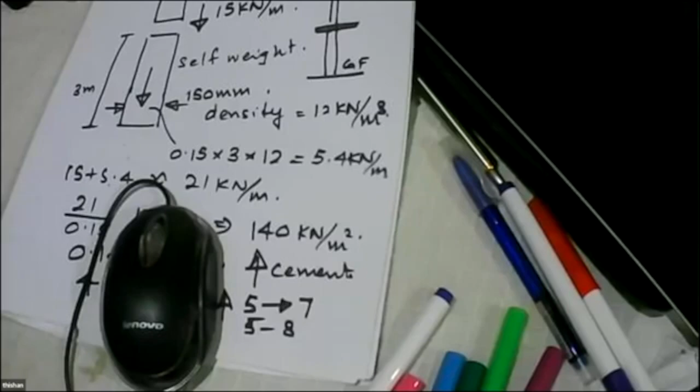That's not the case with flat slabs. In flat slabs, the most critical aspect is shear, not flexure. So you have to take account of shear, the punching shear around the column. If you make the column size bigger, you get a particular advantage. If you look at the handbooks, there are methods of handling punching shear around columns of odd shape, not just rectangular ones. Those guidelines are given in the handbooks, so you can handle it.

Now, why flat slabs are discouraged in Sri Lanka is because the whole concept behind flat slabs is that you save labor, not material. Flat slabs are thick, they need a lot of concrete and steel because they are inefficient in transferring loads onto the columns. But they are very efficient when it comes to construction. That's a philosophy we have to do away with in Sri Lanka, because here materials are very expensive while labor is cheaper. There's no point going for high material, low labor type of construction. We have to always go for low material, even if labor is slightly higher, not excessive but slightly higher. That's the philosophy we have to follow.